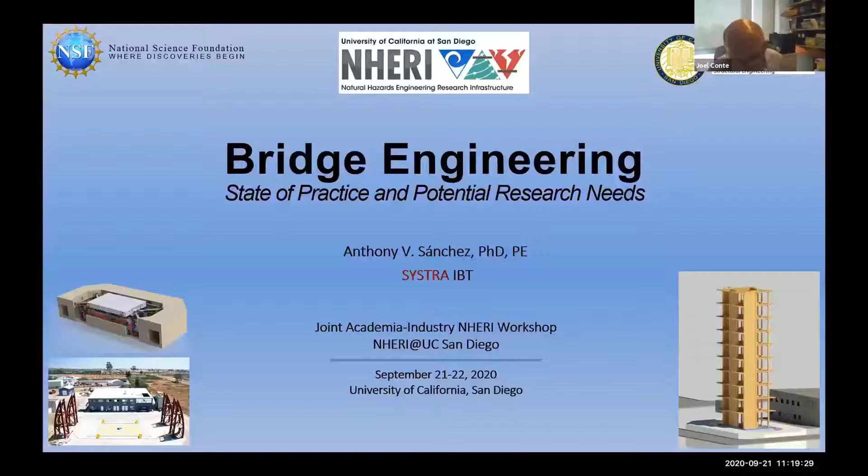As Joel said, I studied at UC Berkeley. At that time, we had the Loma Prieta earthquake in 1989, which was transformational in my life and career, and motivated me to come down to UC San Diego and do my PhD.

At Berkeley, I took my undergraduate courses with Alex Scordelis and Vitelmo Bertero, two earthquake engineering structural analysis specialists. Alex Scordelis advised me to come down to San Diego and study with Frieder Seible.

At UC San Diego, I met this guy from New Zealand, Nigel Priestley. We were doing some very important research in the 1990s. That's when I did my PhD, finished in '98, and then started my career in industry.

I worked for 11 years at the firm of T.Y. Lin International with Man Chung Tang and David Goodyear. Got some really good experience there.

Then I branched out and switched firms, and I was able to design a bridge for my alma mater, which was a big honor for me. This is the Gilman Bridge at UC San Diego.

I'm currently at SYSTRA IBT. We've got Daniel Tassin there, who's a legend in the field of bridge engineering.

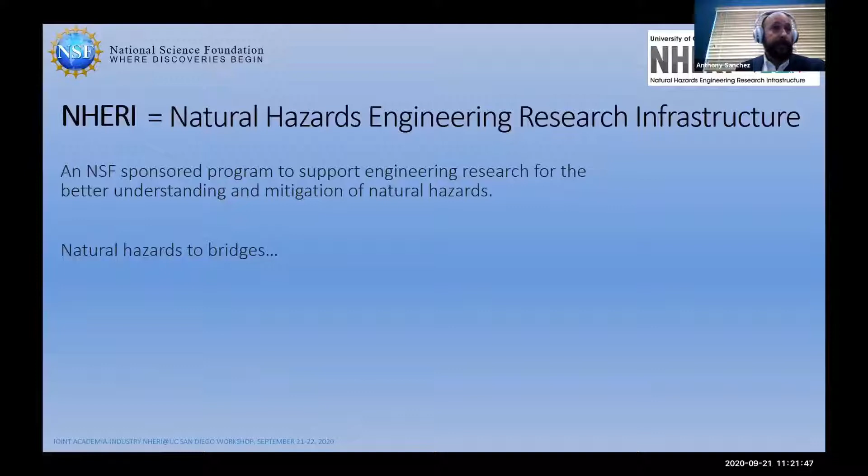What immediately popped in my head was Maurice White. I don't know if many of you know who he was, but he did some incredible work in the 1970s related to natural hazards. He was with a group called, here he is with his research assistants, Earth, Wind and Fire, of course—one of my favorite groups. That's meant to be a joke. I understand many of you are probably laughing right now, so that's great.

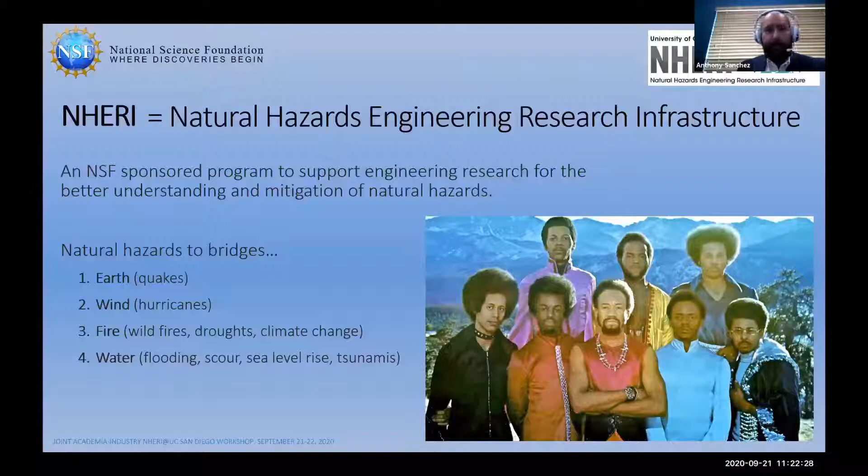I'm going to cover those natural hazards—earth, wind, I'll skip fire, but then move along to water. Before we get to the natural hazards, I wanted to talk about the state of the art of bridge engineering technologies to lay the foundation for the talk, starting at the most basic level with the structural forms.

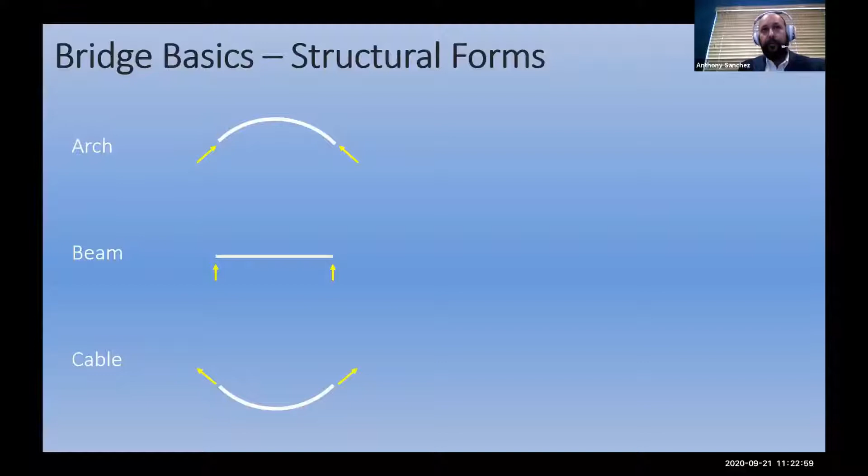In bridge engineering, we use three main structural forms: arches, beams, and cables. These three forms exist in nature—there's an arch, there's a beam, there's a cable. They've also been used for thousands of years by bridge builders, going back to Roman times.

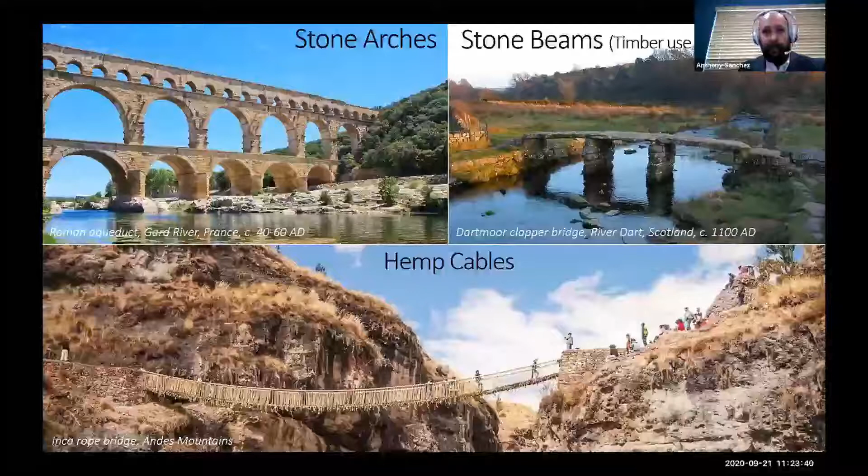There's a Roman aqueduct in France that's 2,000 years old and still standing today. There's a 900-year-old beam bridge in Scotland, a very rudimentary bridge, but it basically exemplifies the form we still use today. And of course, the Incas in the Andes have been designing and building cable bridges for millennia.

Let's fast forward about 1,000 years into present times, from about 1970 to present day. I call this the technological revolution of bridge engineering. Advanced computer analysis, high-strength materials, and advanced construction methods have allowed us to design structures like you see here—this is the Millau Viaduct in France that opened in 2004.

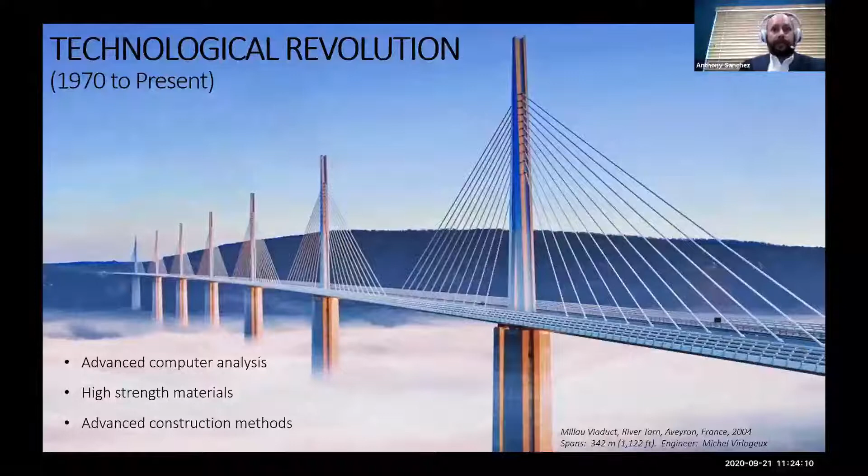This is still state of the art as of today. It allows very long spans, up to about 800 feet for a girder, and allows us to build in remote locations under difficult site conditions because we can build these from above.

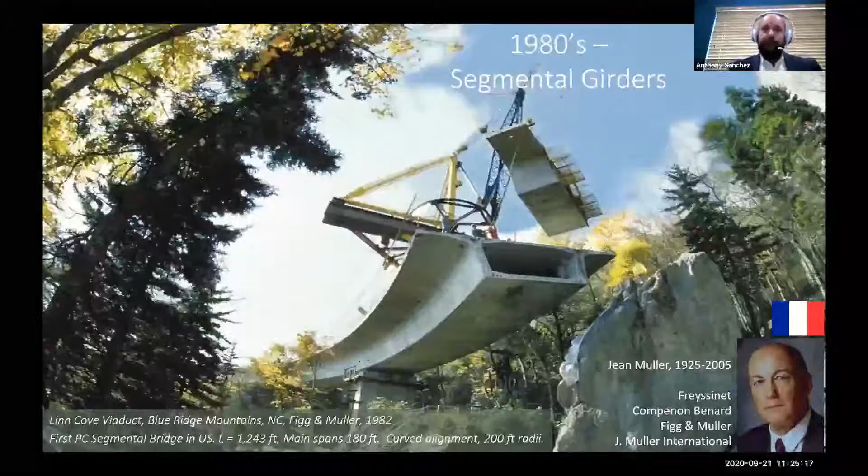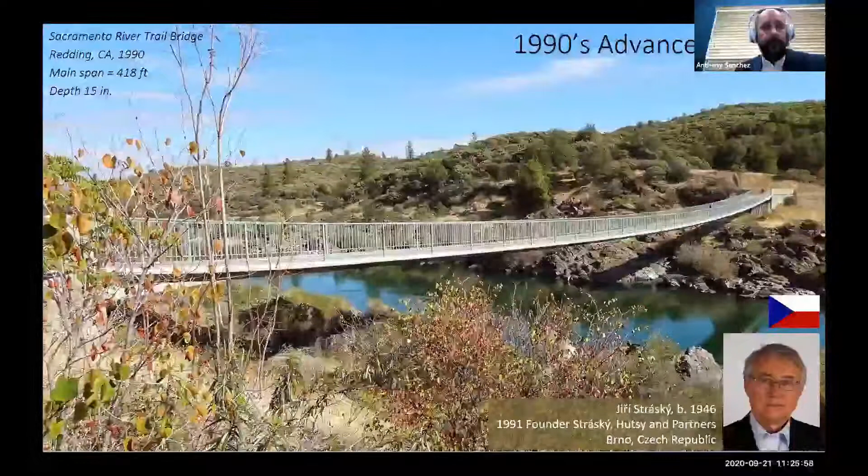That's possible because it works as a cable—basically a very flat suspension bridge with the suspension cables embedded in concrete, so you're walking directly on top of the suspension cables. This form was first used in Switzerland in 1967, and then there were a few examples built in Germany.

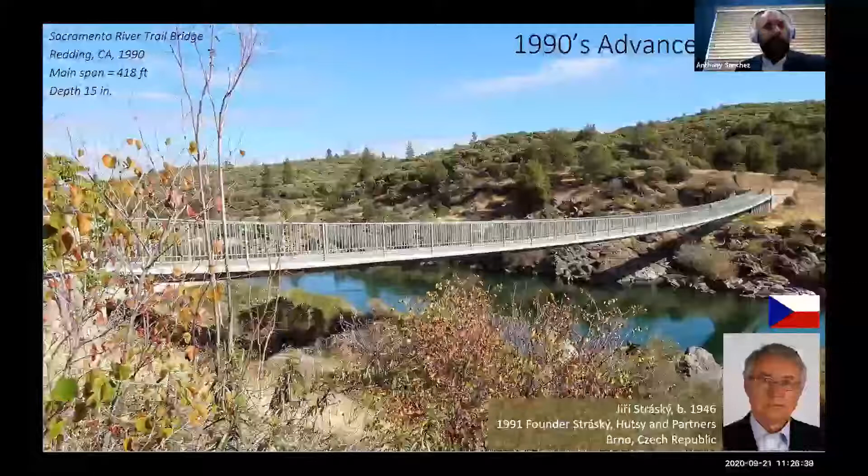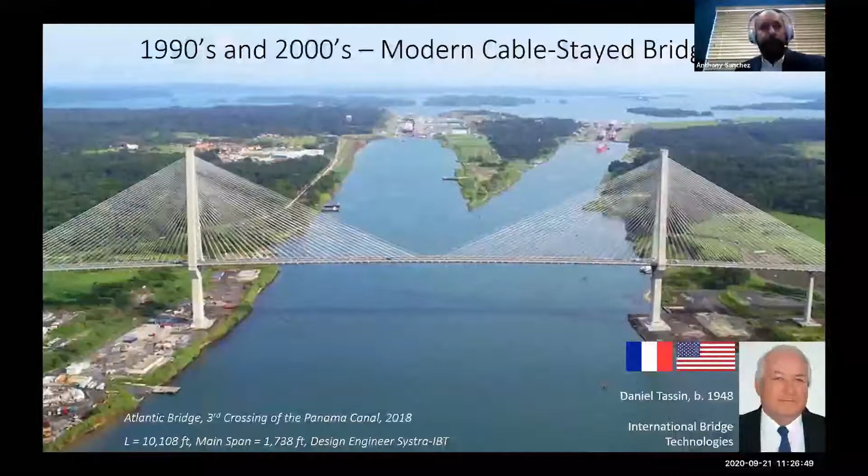Moving on to long span bridges, this is the state of the art today for spans up to about 3,000 feet: a cable stay bridge. This happens to be the longest concrete span in the world, over 1,700 feet between towers. It opened two years ago as the third crossing of the Panama Canal on the Atlantic side, and was actually designed in San Diego by the firm International Bridge Technologies. There's a picture of Daniel Tassin, chief technical officer of our firm.

Coming back to the US, here's a pretty big arch, a concrete arch over the Colorado River, right next to the Hoover Dam. This one opened in 2010. It's a spandrel arch, which has been used for almost 100 years. The notable feature here is the way it was constructed with advanced construction technology.

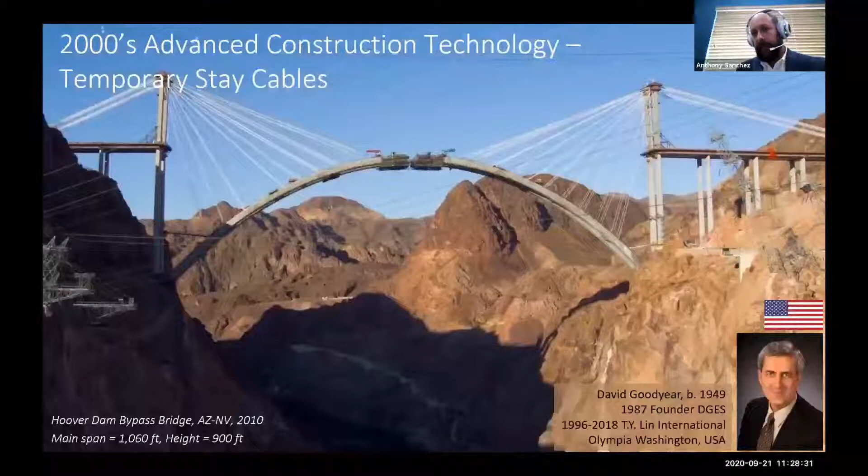Instead of building a support system underneath for the concrete, we designed it so it could be temporarily suspended from stay cables until the arch was closed at the crown. You can see them building the last couple of segments right before closing the arch, then those temporary stays could be removed. So construction technology is key—how to build the bridge at sites like this is paramount. This one was designed by T.Y. Lin International, with David Goodyear leading the effort.

I teach the bridge class at UC San Diego, and I like to show this slide to my students. It's a good example of the historical development of long span bridge technology spanning three centuries. This is a site in Scotland over the Forth River. That first bridge, the red one in the foreground, was built in 1890. That was state of the art back then—it was actually a world record for several years, the longest span in the world.

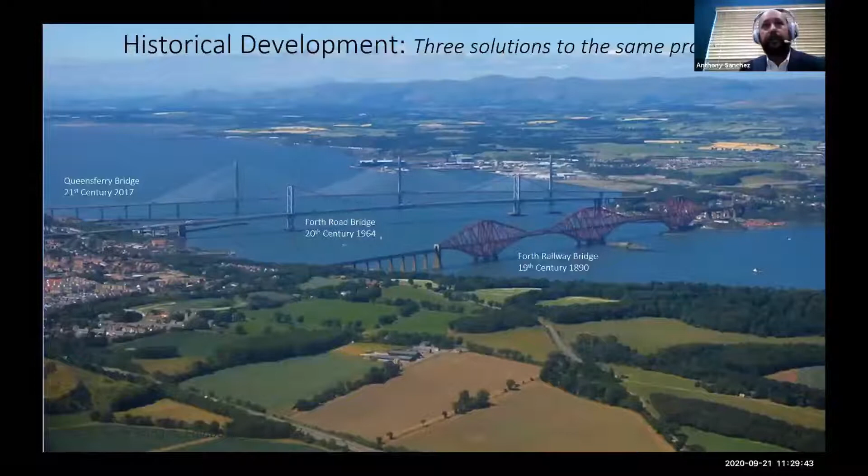About 75 years later, the second crossing was built using 1960s technology, a completely different bridge type—instead of a cantilever or steel truss, it's a suspension bridge using a suspension cable as the main supporting element. Then in 2017, a third crossing was built using the best technology available at the time, once again a cable stay bridge, which is the current state of the art.

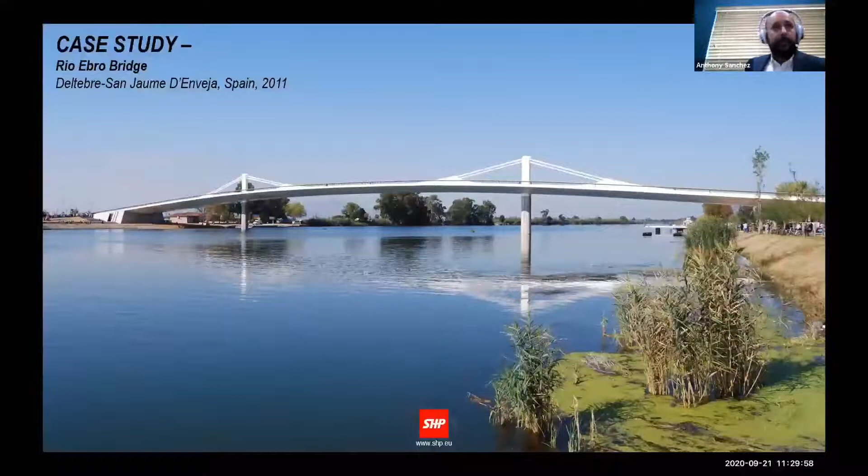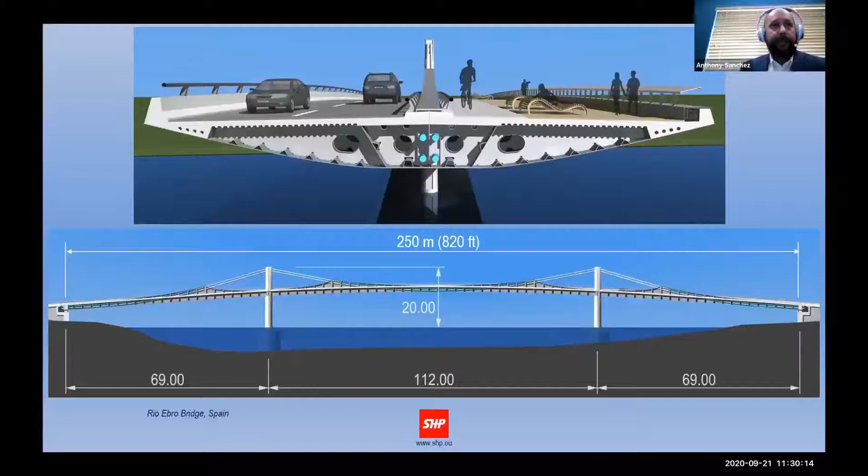Now I'd like to go to Spain and show a few slides on the Rio Ebro Bridge, which opened in 2011, designed by the firm Stráský, Hustý and Partners. It's modest in size, 820 feet from abutment to abutment, but very elegant, sophisticated, and technologically advanced, using a steel orthotropic deck to keep the deck very light. The entire bridge is supported by four cables right down the center—you can see how they attach and suspend the main span.

Instead of anchoring these cables into the ground as a traditional suspension bridge would do with a heavy concrete anchorage, the main cables are anchored to the deck itself. It's a self-anchored system—you see how those four tendons anchor into the ends of the bridge, and that horizontal force is resisted by compression in the deck.

For any given site, it's important to understand the feasible ways to build a bridge, and the bridge designer really needs to understand construction to come up with a cost-effective design. Many times bridge engineers work with a contractor to figure out the most economical way to bridge the site.

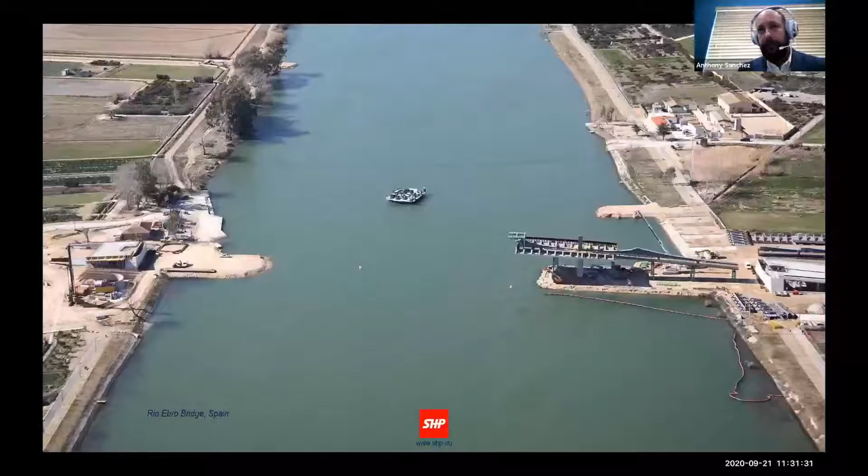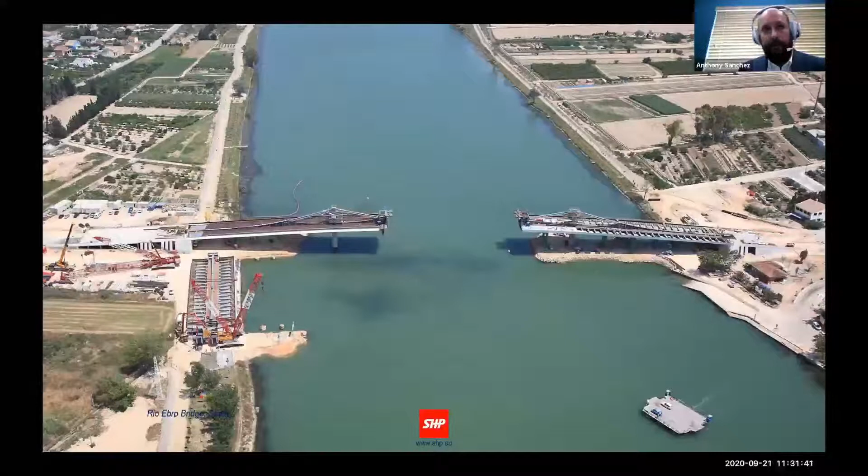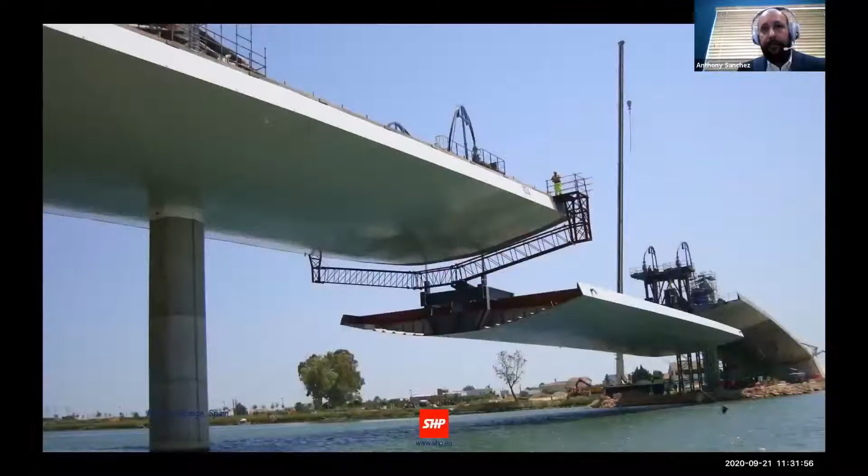For this example, the two ends of the bridge, the approach spans and cantilevers, were built with temporary supports on each side of the river—you can see the temporary islands constructed there. Once the two cantilevers were complete, the middle portion of the central span was fabricated and put into the water. It's basically a boat shape, so it floats, and was pushed into location, then pulled up on winches from the two cantilevers of the bridge, spliced, and then the central post-tensioning tendons, the main cables, were tensioned to complete the bridge.

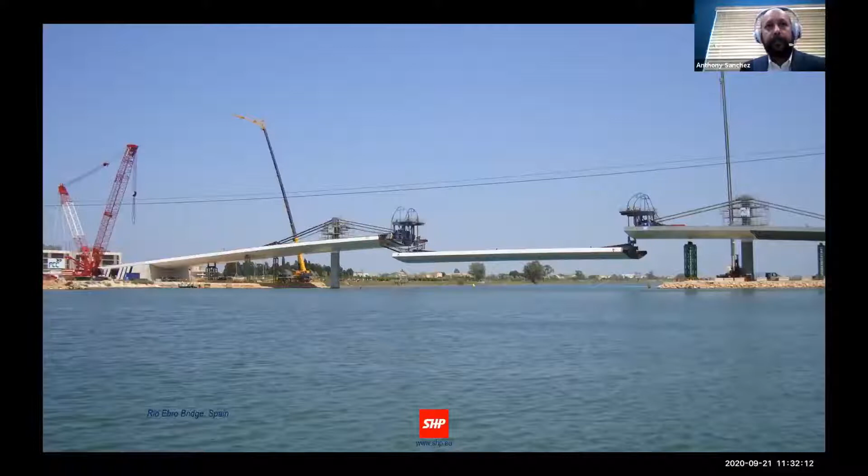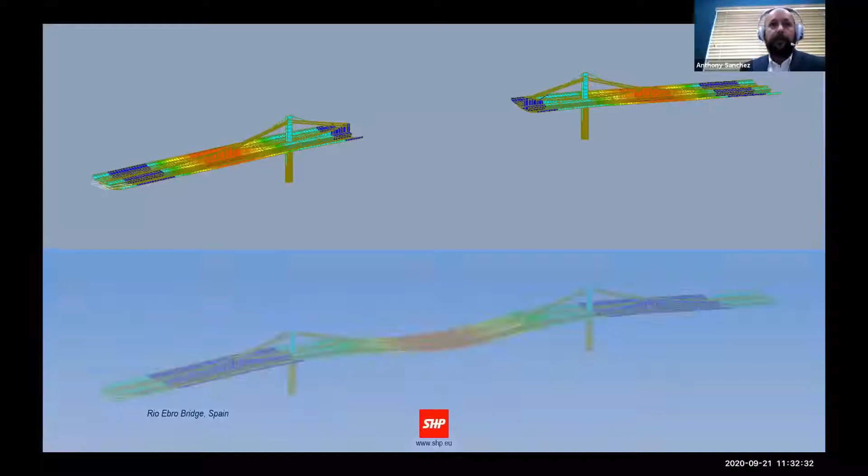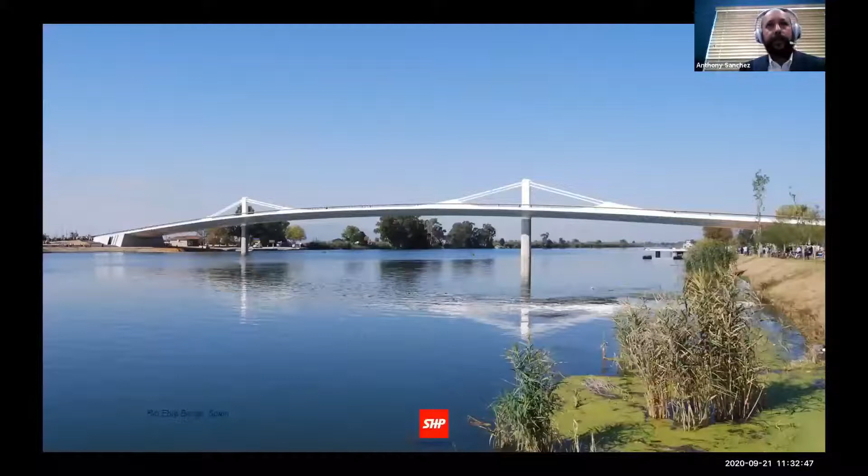As the engineers designing this bridge, we need to develop a good model of the bridge and capture all the stages of construction so we're certain they're going to work. Then, of course, the completed stage, capturing any locked-in effects from the staged construction model, and applying all the live loads and other loads that will affect the bridge during its service life. So there's a completed structure, a very elegant bridge that showcases the state of the practice, the technology we have available today.

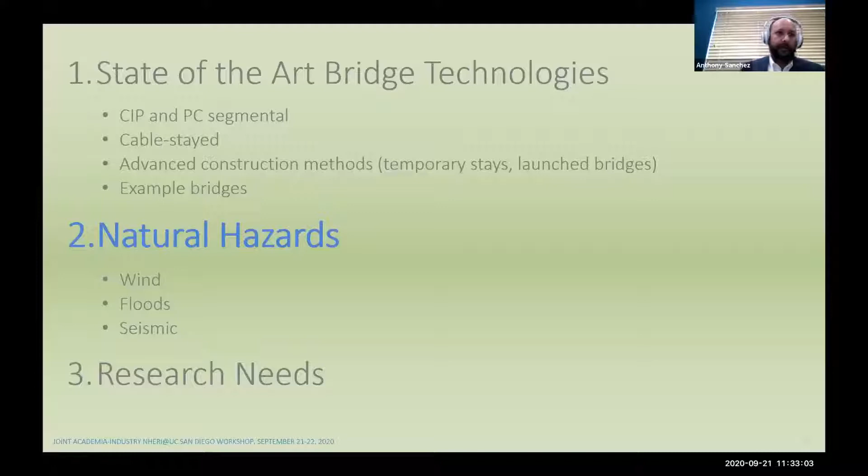So let's move into the second topic, which is natural hazards. That's what this workshop is all about. And I'm going to cover wind, floods, and last but not least, seismic.

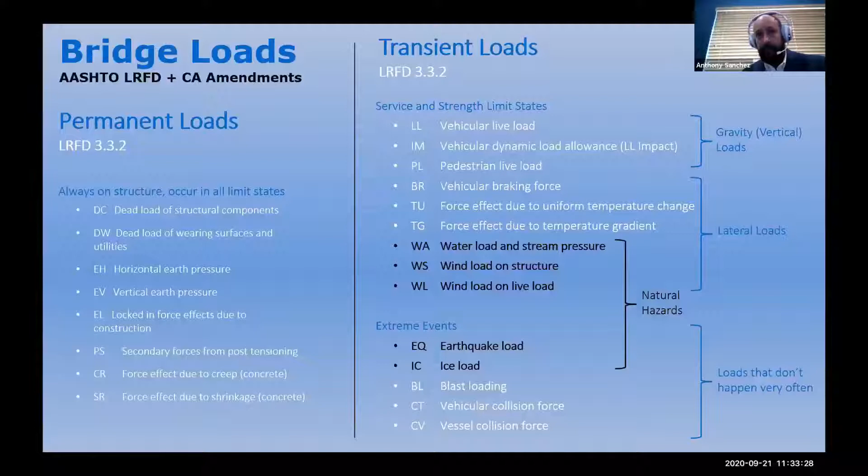In the US, we design our bridges based on the AASHTO LRFD code. Here's a listing of the different loads that we design our bridges for. Highlighted in black are the loads from natural hazards, including water loads, stream pressure, wind loads, and earthquake loads.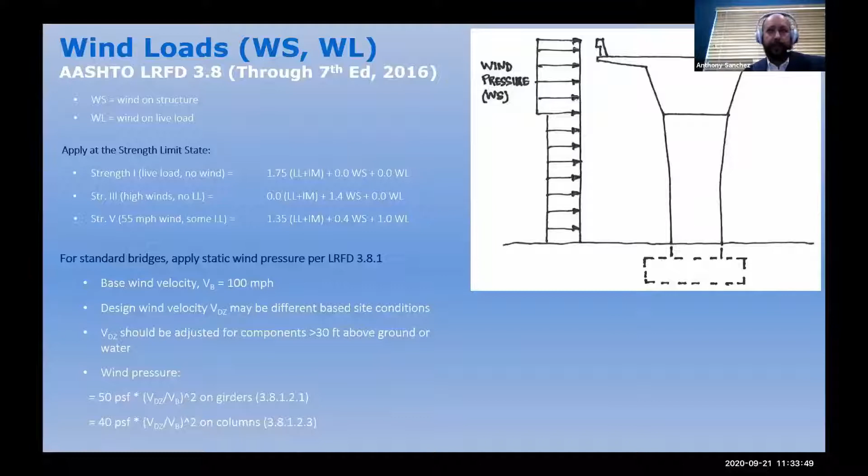For wind loads, for most bridges that are small to moderate in size, we do a very simplified approach where we just apply static wind pressures, typically about 50 psf on the superstructure and about 40 psf on the substructure. For longer span bridges, that simplified approach is no longer adequate.

As we all well know, many of you remember seeing these videos of the Tacoma Narrows Bridge collapse in 1940. That was before we had a good understanding of how wind affects the response of long span bridges. So this bridge was redesigned and rebuilt about 10 years later, this time using wind tunnel testing and applying aerodynamic theory. It was more of a brute force approach, where a very stiff truss was added to prevent the oscillations of the deck.

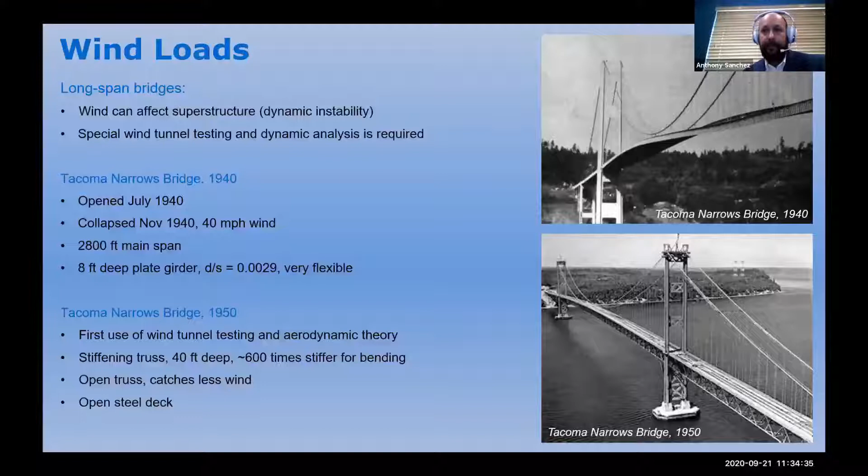Today, we would have a more elegant approach, where we have more sophisticated dynamic models and more sophisticated wind tunnel testing, and we're able to reduce the effects of wind by using a more aerodynamic shape of the deck.

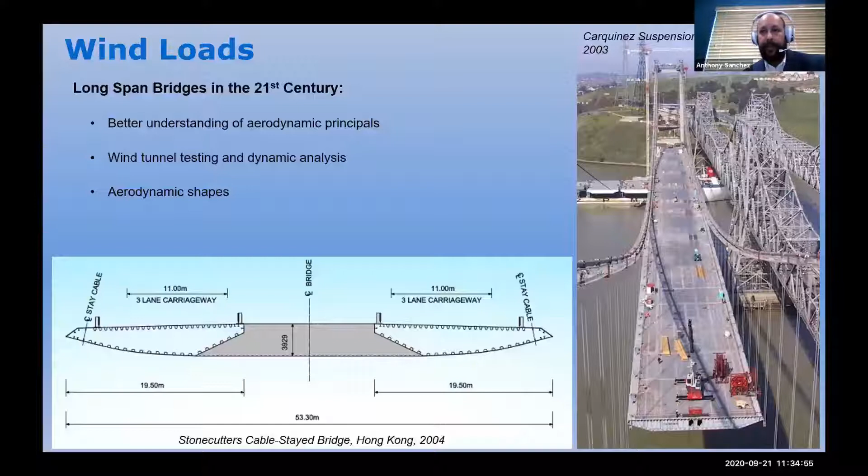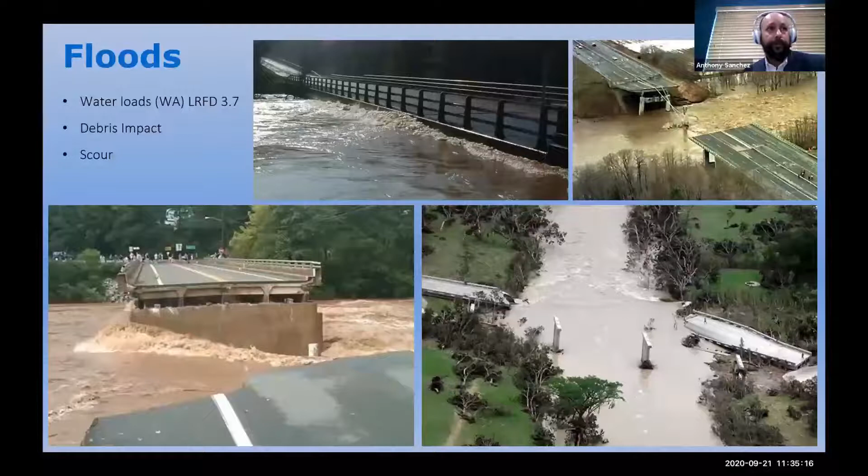So let's move into water loads and floods. Most bridges cross over waterways, rivers, and so forth. So during times of flooding, we need to be able to resist these water loads, loads from debris impact, and also the effects of scour.

This is what scour looks like. It's actually the number one cause of bridge failures in the US, more so than seismic for sure. And scour is not really a loading, but more of a change of boundary conditions, where the foundations may become undermined and unstable.

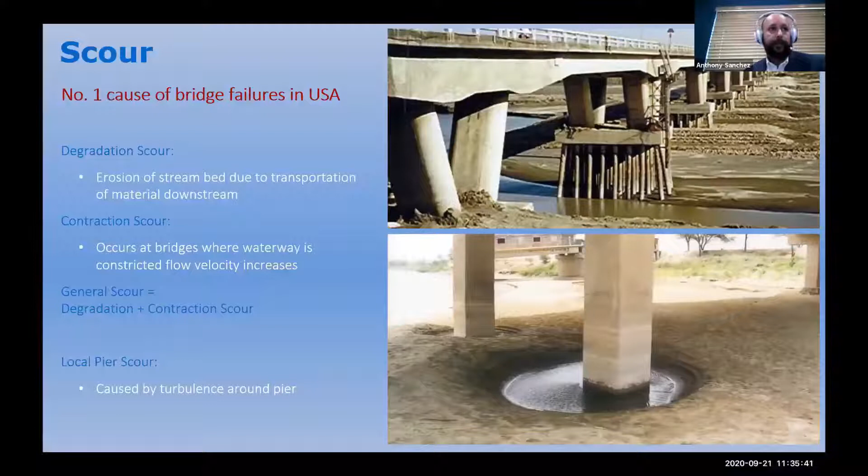So now let's move into earthquakes. Of course, in California and other seismic regions of the world, seismic is a very important loading for bridges. It's most likely the largest loading that a bridge will ever see, and we need to understand how this works.

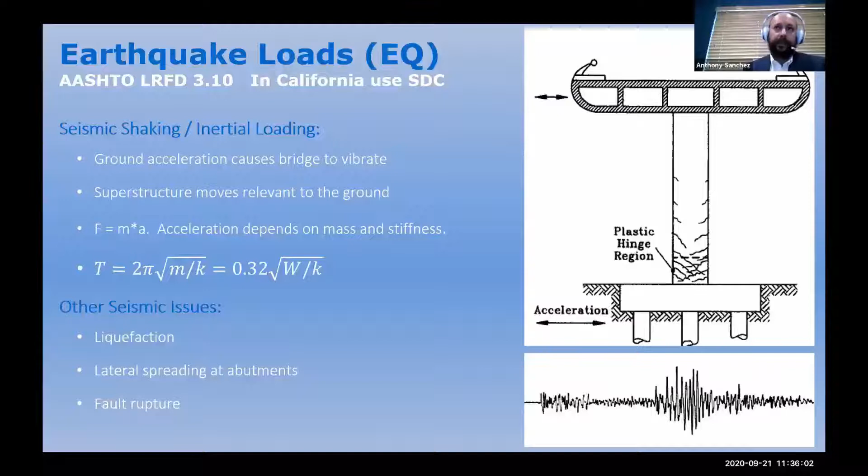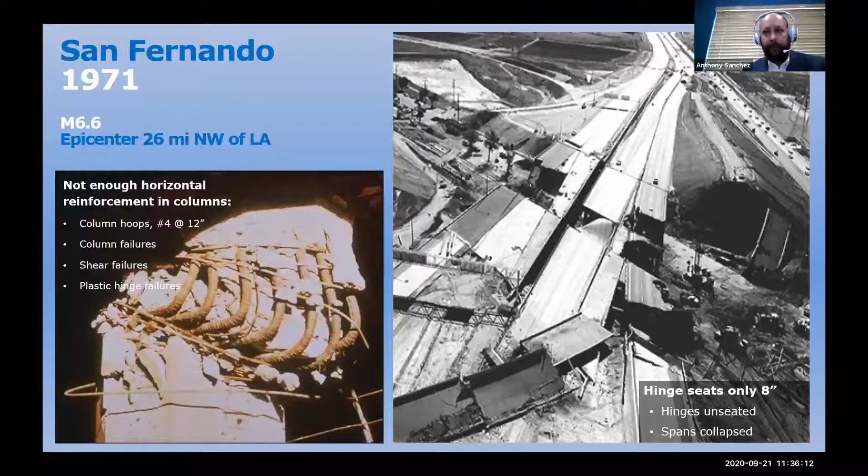In California, we've learned from 3 major earthquakes: San Fernando in 1971—you can see some of the effects of that earthquake here—Loma Prieta in 1989, and then Northridge in 1994.

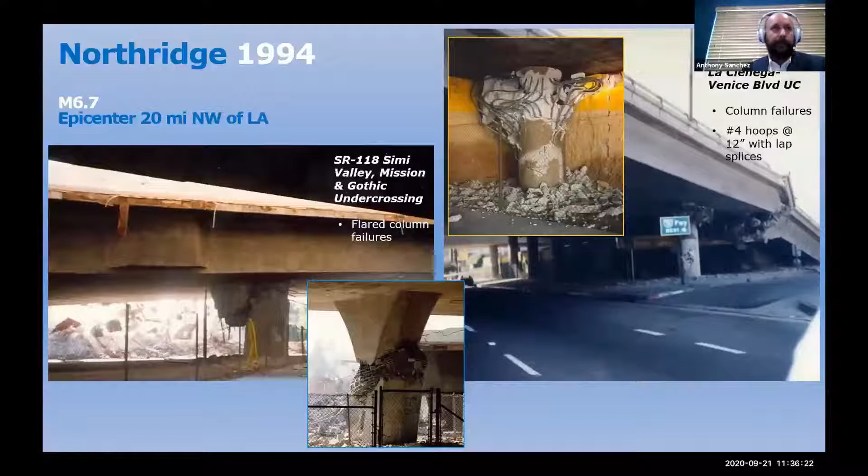So what we've learned from these 3 earthquakes are the 3 most common failure modes, and that is unseating of expansion joints, where a complete span could collapse because it's unseated; failure of columns because of inadequate horizontal reinforcement to resist shear and provide ductility; and also improper detailing of beam column joints.

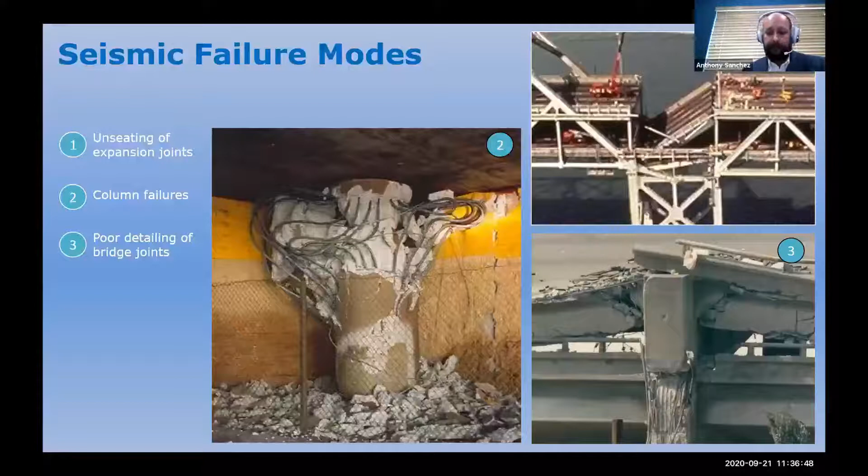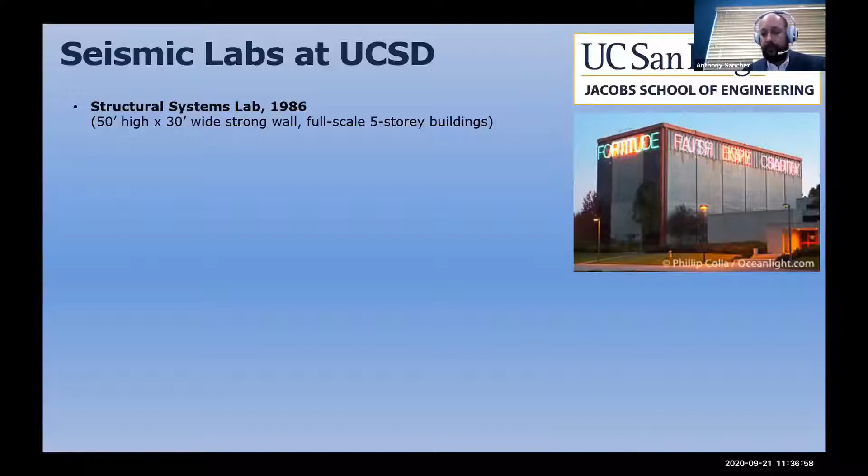So let's go back to UC San Diego. In 1986, the first structures lab was opened, just awaiting to get some funding for testing. Talk about being at the right place at the right time.

In 1989, the Loma Prieta earthquake hit, and that generated an influx of funding for seismic testing. Followed up in 1994 by Northridge, which created a big backlog of testing. A lot of people, myself included, and a lot of my colleagues got PhDs doing this research.

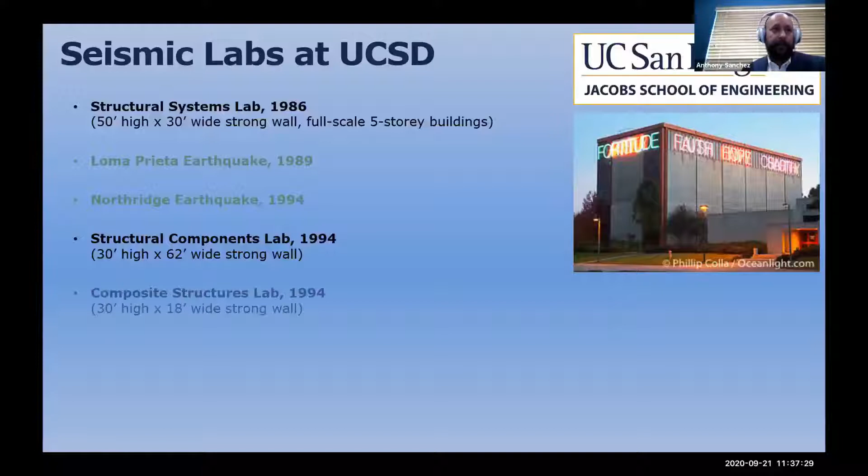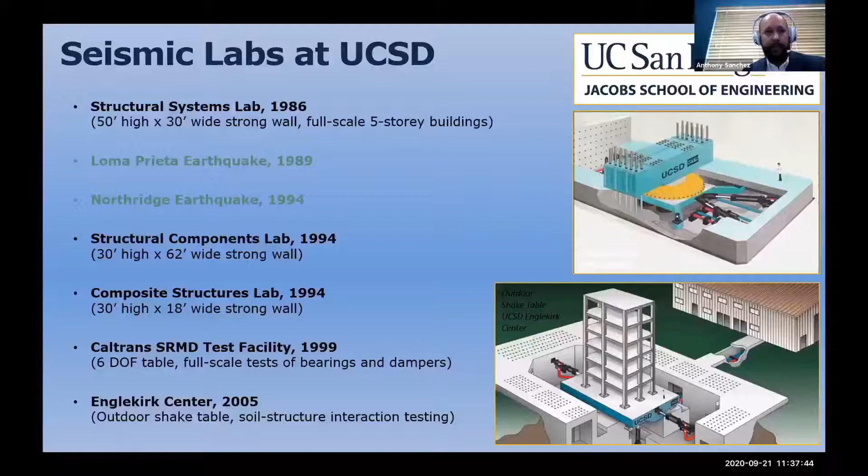In '94, we opened the Structural Components Lab and the Composite Structures Lab, and then the SRMD facility in 1999 to test full-scale bridge bearings for many of the toll bridges throughout the state. And then in '05, the Englekirk Center was opened with the outdoor shake table, which is the focus of today's workshop.

I'd like to acknowledge the founders of the Department of Structural Engineering: Gil Hegemier, Frieder Seible, Nigel Priestley, and Enrique Luco. These were the professors that started the department and were instrumental in a lot of the seismic research, which changed the way we do seismic design, not only in California, but around the world.

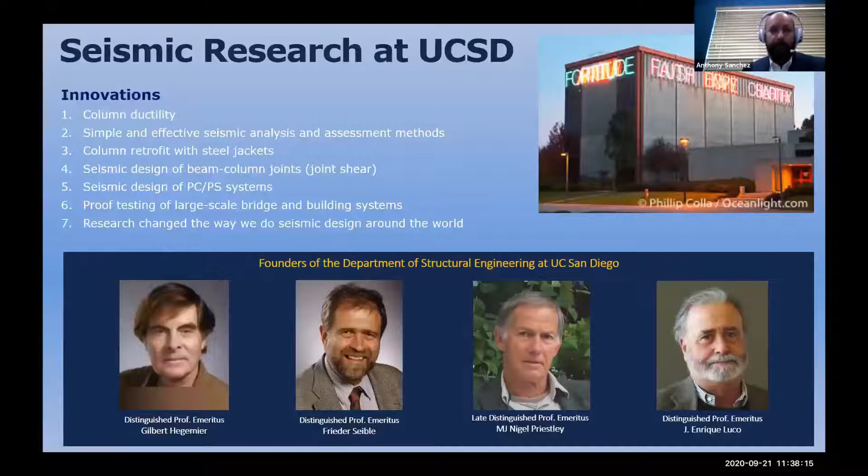We tend to design for larger seismic shaking today than we did 50 years ago. It's a displacement-based approach, utilizing capacity design philosophy.

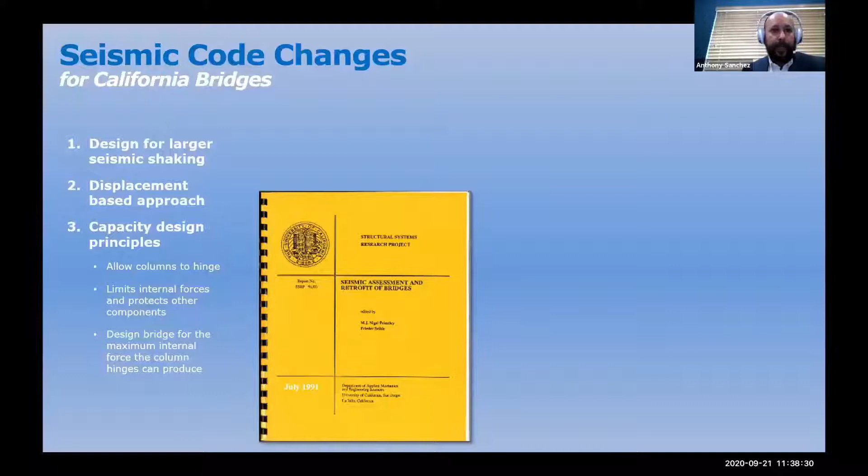The report that came out in 1991 was instrumental in changing the way that Caltrans assesses bridges. This worked its way into Memo to Designers 20-4 for retrofitting the bridges throughout the state.

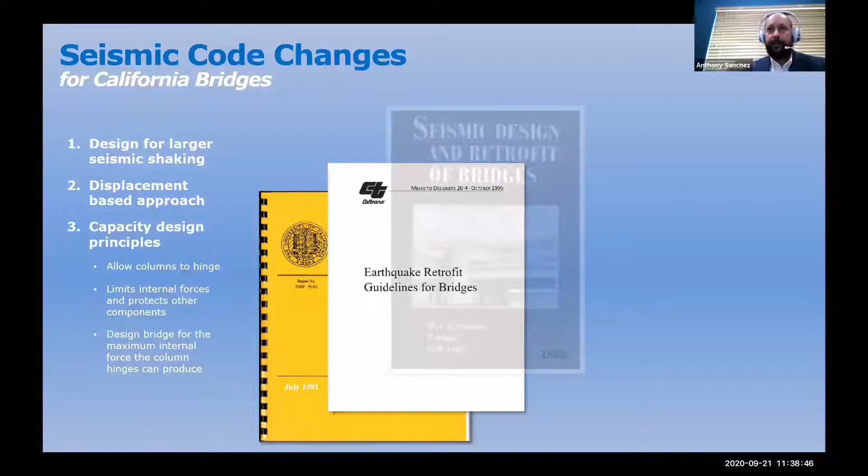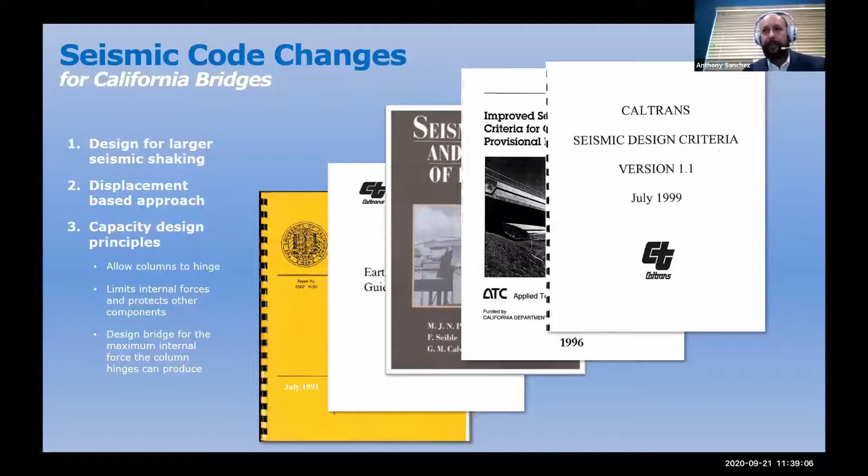This textbook came out in '96 based on this research, the Priestley, Seible, Calvi textbook, which is seen as the Bible for the seismic design of bridges. And then ATC 32, which turned into the Caltrans Seismic Design Criteria, came out in the late 90s as the first version, and was just updated 3 years ago to version 2.0, but it's still largely based on that work done in the 80s and 90s at UC San Diego and other research institutions.

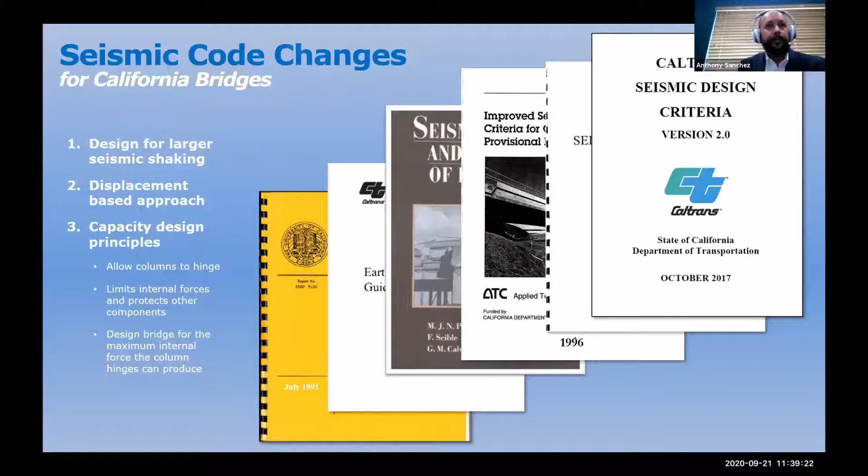So we tend to treat ordinary bridges different than important bridges. Ordinary standard bridges are covered by the SDC, and we rely on ductility. We design for just one design level earthquake, which is roughly a 1,000-year return period.

For important bridges, that could be either a lifeline structure or a major crossing like the Bay Bridge you see here, project-specific design criteria is established many times with a multi-level approach, where we're looking at small earthquakes where there should be no damage, medium-sized earthquakes where there can be damage but you need to be able to open the bridge immediately after the earthquake, and very large earthquakes where we're looking at preventing collapse.

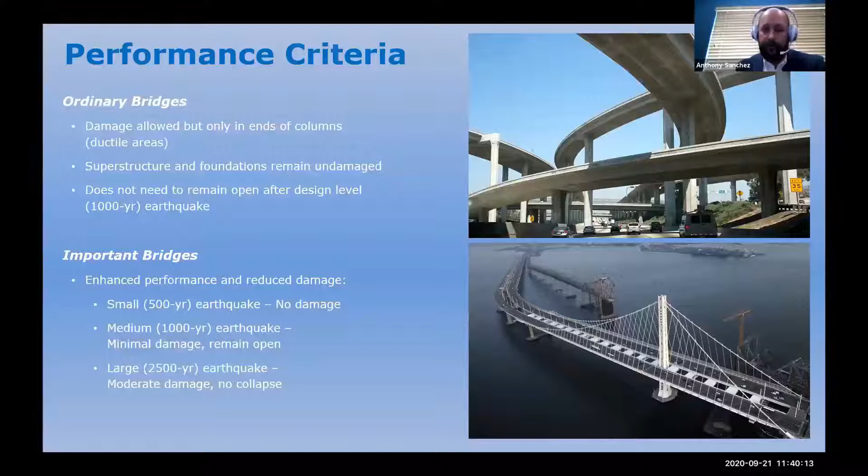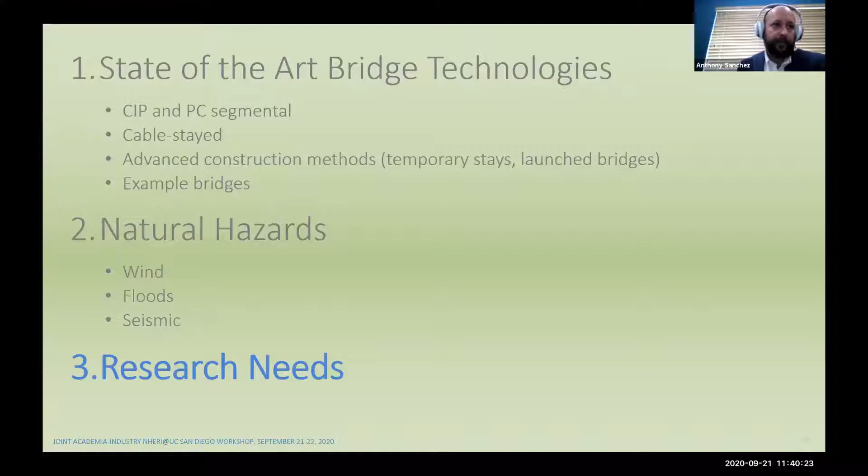So now let's move into the research needs, and the focus on the research needs is also based on the wind, the floods, and seismic. I reached out to Caltrans a few weeks ago to get a handle on the types of research that Caltrans is doing, and they sent me some of their catalogs of the recently completed research as well as the ongoing research, and I've summarized it here.

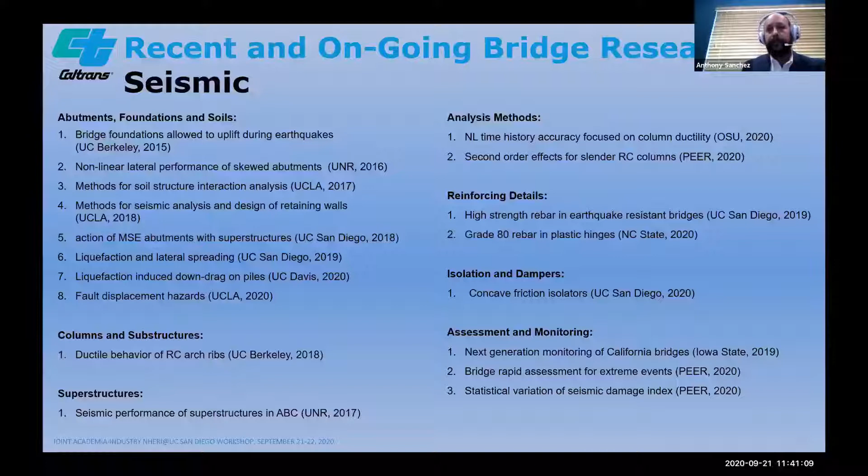Caltrans is still spending about $25 million a year on bridge research, and most of it is still seismic research, where they're looking at the response of abutments, foundations, soil structure interaction, columns and substructures, superstructures, analysis methods, reinforcing details, isolation and dampers, and assessment and monitoring.

They're also looking at other topics, including accelerated bridge construction. This is an important topic now because many of the bridge projects that we're doing are in urban areas where we're widening or replacing a bridge over traffic, and it's important to get in and get out quickly so we're not disrupting traffic for years on end. So ABC is an important topic.

Some of this ABC research is related to seismic, to make sure we can get good seismic performance out of these precast systems, looking at pre-stressed precast girders, bridge decks, and other effects.

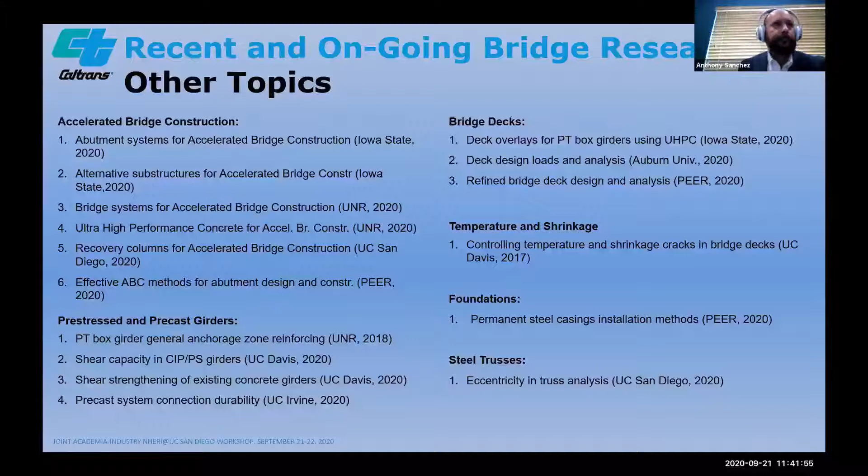Going back to the flood hazards and scour, I can see this as a potential research topic. It's not really a structural issue, it's more of a topic for our colleagues in hydraulic engineering. But if we can develop better ways to reliably assess scour, many times the current tools that we have provide scour depths that I believe to be unrealistically large. If we had a better way to assess scour depths, that could save some money in terms of the construction of our new bridges. Also, ways to reduce scour with more streamlined pier shapes and other hydraulic devices that could reduce scour.

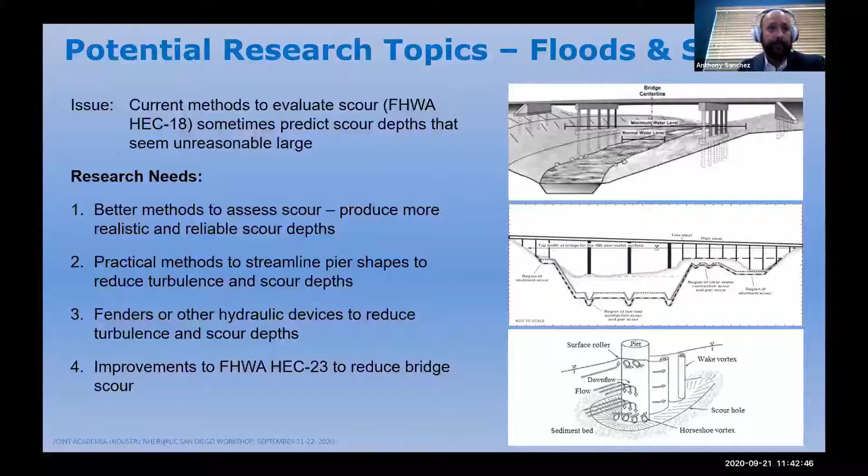Moving into structural engineering and concrete, creep drives the design of our cantilever bridges, our segmentally constructed cantilever bridges, where they begin as cantilevers and then they turn into continuous beams once we close the midspan, and then creep takes over. AASHTO and ACI don't adequately address the way that creep works. It can be unrealistic and many times unconservative.

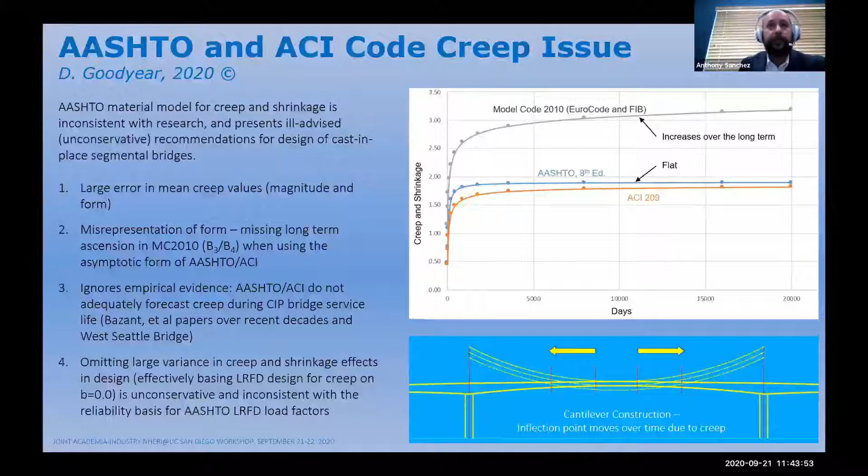And then for seismic, the trend or the current codes use ductility, which is a good economical way to design our bridges for collapse prevention and to save lives. The downside is that many of these bridges will be damaged beyond repair after a big earthquake, meaning that we may have to go in and replace a lot of the damaged bridges, even though they performed well up to the current standards. We could do better potentially if we start to investigate ways to prevent damage with elastic systems.

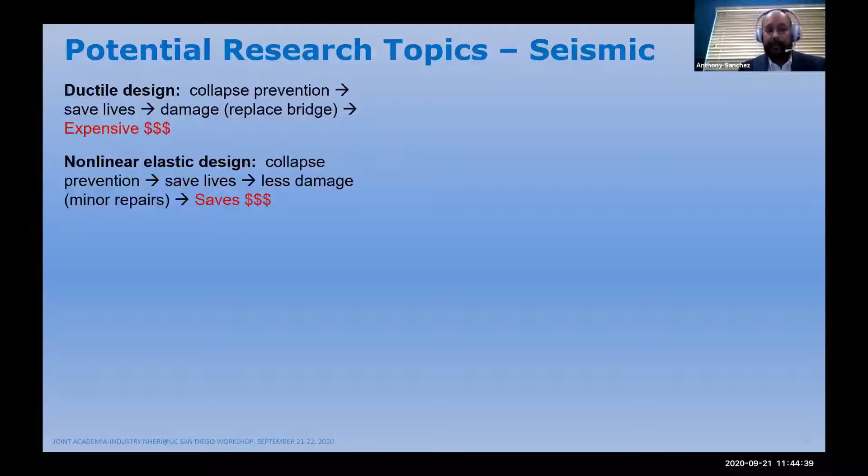And that can be either foundation rocking could help with that, where we allow foundations to rock to reduce structural damage. That's a potential area of research using the new shake table, and also using unbonded pre-stressed tendons in columns so that we have less damage after an earthquake.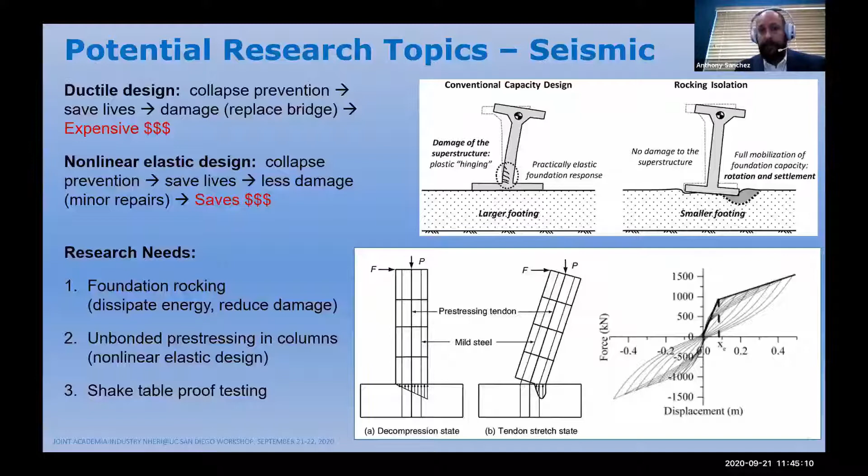These systems self-center and they reduce damage. Here's a slide that Professor Restrepo shared with me showing a two-column bent that they tested with unbonded tendons, and it performed very well, self-centered, with very minimal damage after a big earthquake.

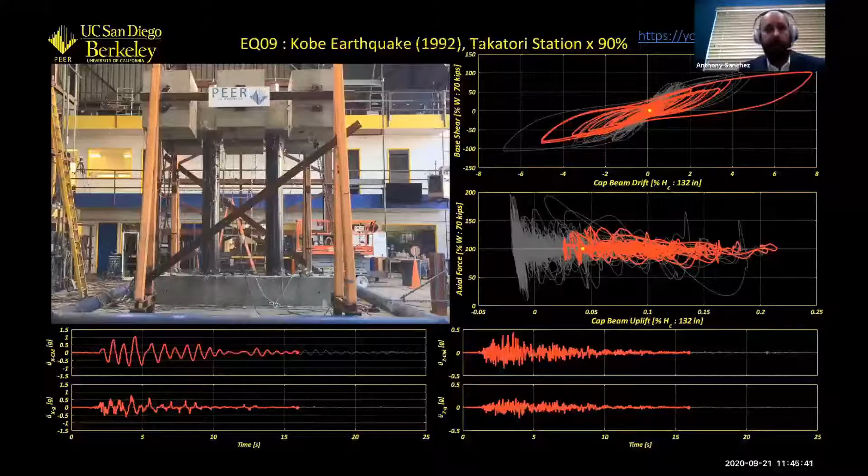So these are the systems that I'm talking about that I think is the next generation of seismic design. We need to do more research to prove that these systems are reliable and robust and will work well, and can be implemented in the field. Also would like to address reliability and robustness in terms of bridges.

And then moving on to the FIU bridge, which was a non-redundant concrete truss that collapsed in 2018 while it was under construction. The cause of that was poor detailing of a joint. That one is still under investigation.

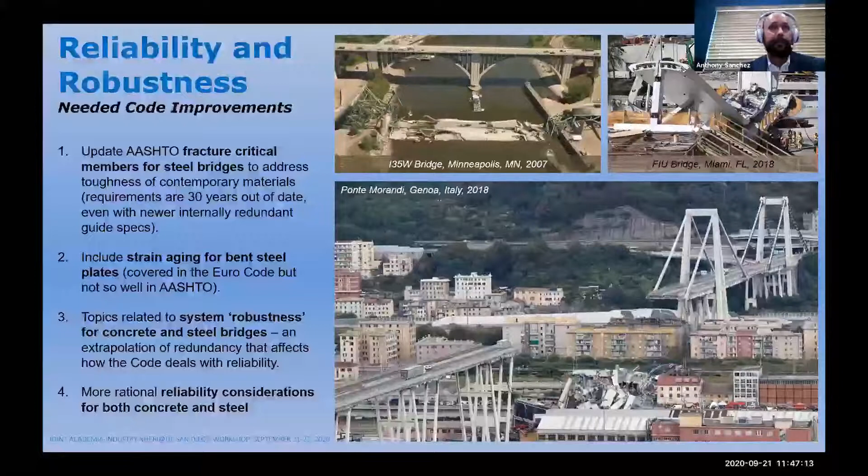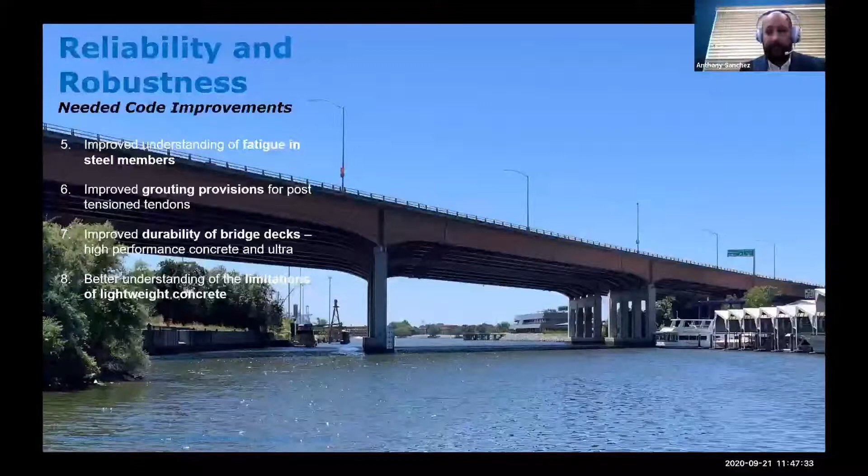But reliability and robustness also deals with durability and maintenance. Here's an example bridge in Stockton that was built in 1972 that most likely needs to be replaced. It's not in danger of collapsing, but it's become a maintenance issue. This is a state-owned bridge that Caltrans is spending millions of dollars each year patching the deck.

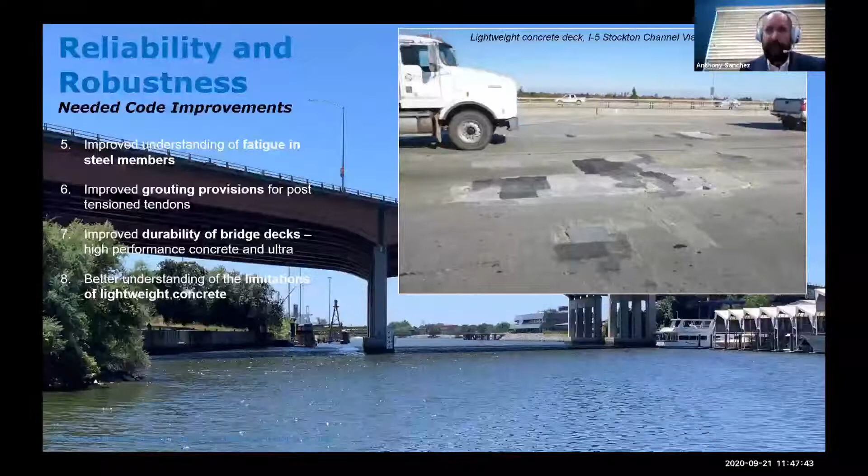And what led to this poor performance has to do with actually fatigue of steel. So it's a steel girder bridge, and it's braced with these pipe braces. After many cycles - the bridge is 48 years old - about 10 years ago they started to see fatigue cracks in the braces, where some of them just completely failed, leading to more flexibility in the girders.

So the deck is deflecting more, and it's a lightweight concrete deck, which is prone to spalling. So the deck is spalling and cracking, and for Caltrans it's just turned into a money pit in terms of maintenance. So some other potential research topics dealing with fatigue and durability of bridge decks, and also understanding when to use lightweight concrete - those are also some potential research topics on the bridge side.

So with that, I'd like to go ahead and stop and thank you for your time. And if we have time, I can answer some questions.

Thank you very much, Tony. Thank you very much for your very interesting presentation. Great, you're welcome. I think there is - let me read the question.

What is the state of the practice in bridge seismic design or performance-based design, considering the soil-foundation-bridge interaction?

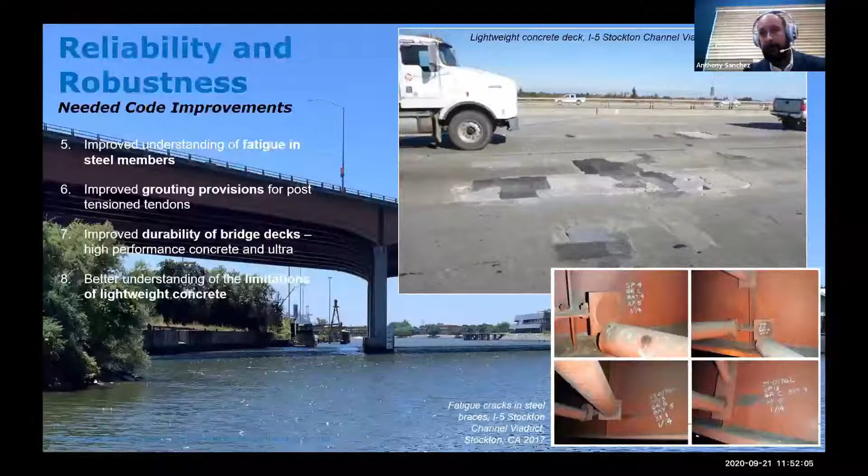Well, this is what the topic of this slide is. There's a lot of old bridges that are starting to see deterioration, mainly in the decks. The decks get beat up because you have heavy loads driving on them. There are needed deck replacements or overlays. Some of these present challenges, especially if it's a post-tension bridge, where the deck is resisting compression loads from post-tensioning. So how do you replace a deck on a post-tension box girder bridge?

So I think advancing the technology in terms of how to repair bridge decks, with overlays, with advanced materials - there's a lot of room there for research, to come up with ways to repair these aging bridges.